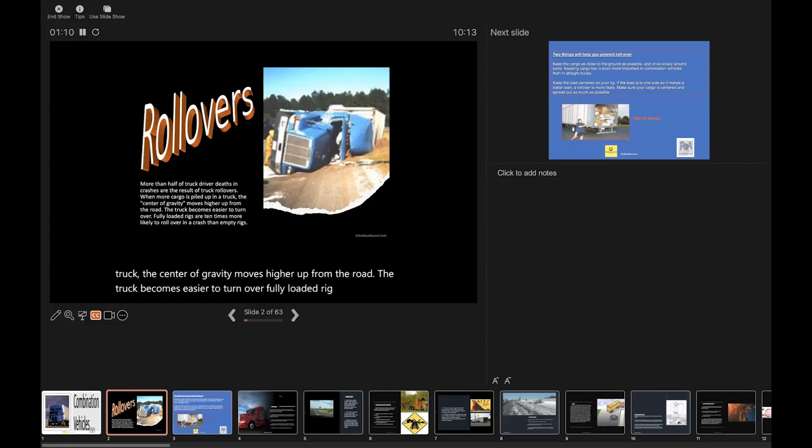Okay, so rollovers. More than half of truck driver deaths in crashes are the result of truck rollovers. When more cargo is piled up in a truck, the center of gravity moves higher up from the road, and the truck becomes easier to turn over. Fully loaded rigs are 10 times more likely to roll over in a crash than empty rigs.

Two things to help prevent a rollover: keep the cargo as close to the ground as possible, and drive slowly around turns. Keeping cargo low is even more important in combination vehicles than in straight trucks. Keep the load centered on your rig. If the load is to one side, making the trailer lean, a rollover is more likely. Make sure your cargo is centered and spread out as much as possible.

So if you look at this picture, this is what we call loose loaded - it's not palletized, it's just boxes all up in here. Does this look like the right or wrong way to load the trailer? Just put it in the chat. Yeah, it's absolutely wrong. If you open these doors, all of this can just fall on you once you get to your final destination.

So anything that's loose loaded should not be loaded all the way to the back. You should definitely have some space, and you should definitely have some load bars or netting, something to secure this so that when you open the doors, it doesn't just fall on you.

Those of you who are not leaving Texas for work, you might get on Dollar General accounts, or Dollar Tree, UPS, mail, Amazon. All of these are loose loaded trucks or trailers. So this is very common to see, but this is also very unsafe.

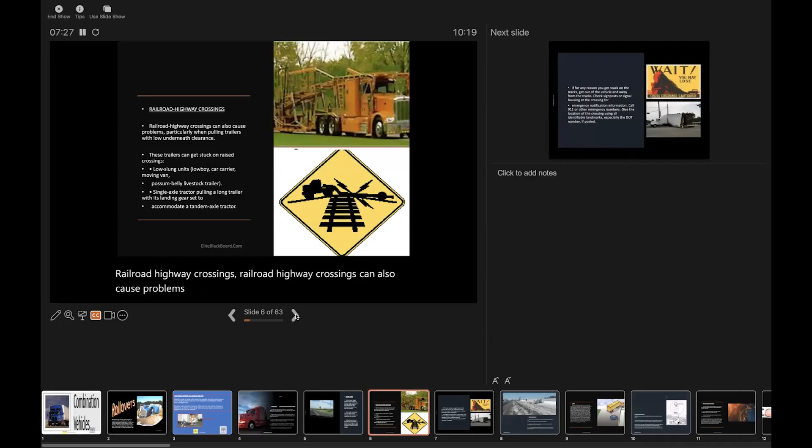Railroad highway crossings can also cause problems, particularly when pulling trailers with low underneath clearance. These trailers can get stuck on raised crossings: low slung units, low boy car carriers, moving vans, possum belly livestock trailers, single axle tractor pulling a long trailer with its landing gear. All of these are examples of trailers or truck and trailer combinations that can absolutely get you stuck on a train track, so you definitely want to be cautious. And I like this sign, which is why I put it, because it shows me this trailer is entirely too low and it absolutely can get caught in this pivot right here because of it being a combination vehicle.

If for any reason you get stuck on the tracks, you want to get out of the vehicle and away from the tracks. Check your signposts or signals housing at the crossing for any emergency notification information. You want to call 911, give the location of where you are, any identifiable landmarks if you're in a rural area especially, the DOT number if it's posted. Sometimes you'll see mile marker number 234 - you want to give them that information, let them know if you're southbound, northbound, east or west.

Preventing trailer skids: when the wheels of a trailer lock up, the trailer will tend to swing around. This is more likely to happen when the trailer is empty or lightly loaded. Recognize the skid - the earliest and best way to recognize that the trailer has started to skid is by seeing it in your mirrors. I mentioned this last week, if you can recall. You can tell when your trailer is starting to skid. Sometimes you can feel it, but you absolutely can see it. It's one of the things that I did all the time when I was on the roads and it was snowing. I was definitely alert.

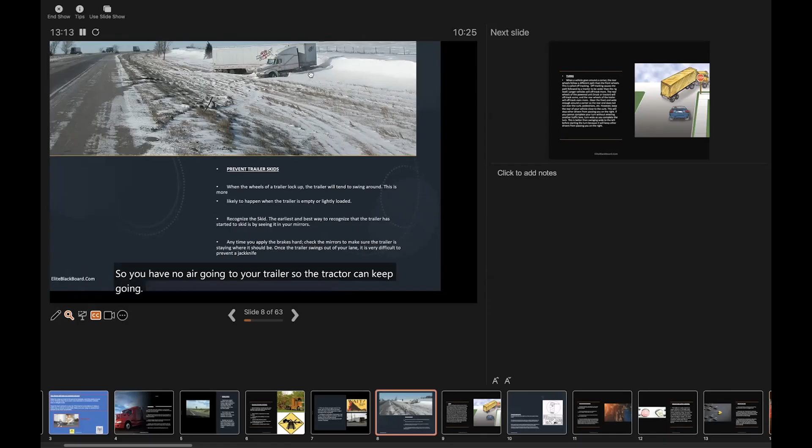Yes, you most likely will have to get a tow truck. What happens is all of the wires, your air lines, everything connected from your truck to your trailer has popped, so you have no air going to your trailer. The tractor can keep going as long as you didn't mess up anything underneath, but the trailer cannot, so it would have to be lifted off the ground by the tires and towed. Sometimes the tractor by itself is fine and can disconnect so you can get your trailer towed, but for the most part, depending on how you got jackknifed, you messed up your tractor too.

Okay, so turns. When a vehicle goes around a corner, the rear wheels follow a different path than the front wheels. This is called off-tracking. Off-tracking causes the path followed by a tractor to be wider than the rig itself. Longer vehicles will off-track more. The rear wheels of the powered unit, your truck or tractor, will off-track some, and the rear wheels of the trailer will off-track even more.

Steer the front end wide enough around a corner so the rear end does not run over the curb, pedestrians, etc. You can see he's going around the corner very close. You don't want to turn like this car is doing here - you're going to take all of this out, even in the black. You definitely want to come out and start turning. He can potentially hit all of this because he turned out, but he turned in too sharp.

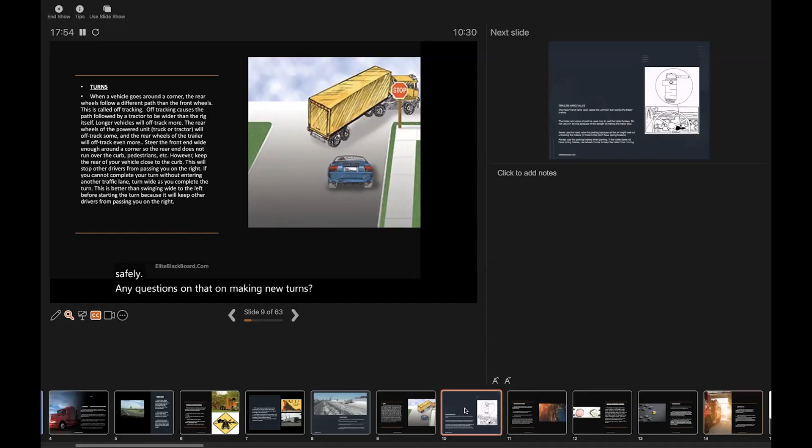So the trailer hand valve, also called the Johnson bar, haven't heard anybody call that outside of this book, works the trailer brakes. The trailer hand valve should be used only to test the trailer brakes. Do not use it in driving because of the danger of making the trailer skid, all right? So that's what you see right here on the steering wheel. A lot of your trucks do have this, all right? So I do want you to know what it's for. All right, so I'll go over this again. The trailer hand valve works the trailer brake, all right? But you do not use this while you're driving.

Never use the hand valve for parking because all the air might leak out, unlocking your brakes. Always use the parking brakes when parking. If the trailer does not have spring brakes, use wheel chocks to keep the trailer from moving.

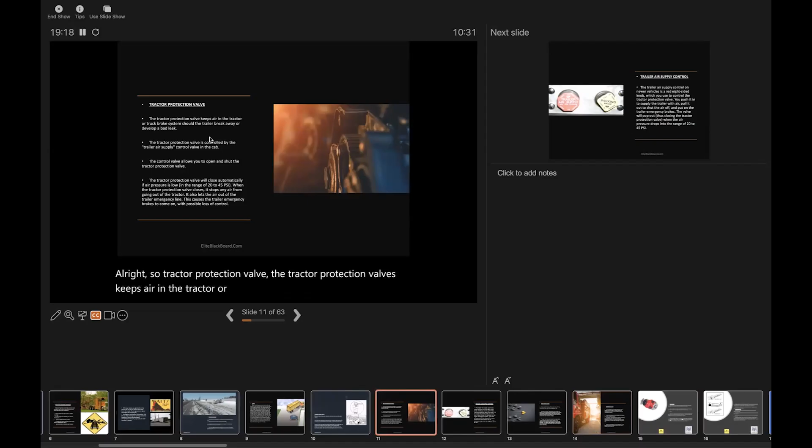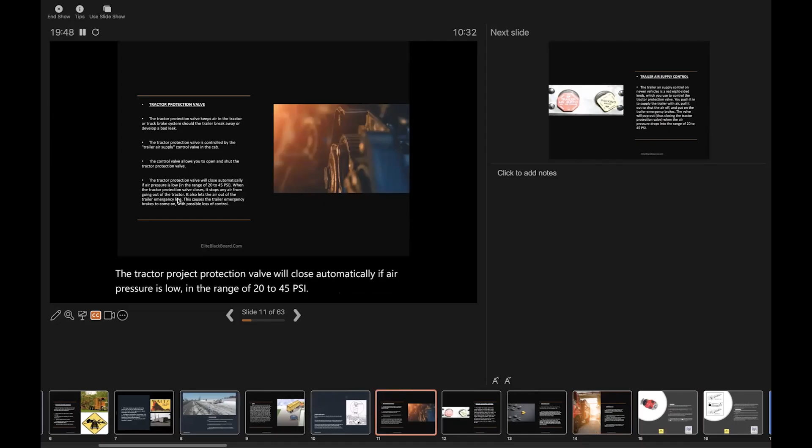All right, so tractor protection valve. The tractor protection valve keeps air in the tractor or truck brake system should the trailer break away or develop a bad leak. The tractor protection valve is controlled by the trailer air supply control valve in the cab. The control valve allows you to open and shut the tractor protection valve. The tractor protection valve will close automatically if air pressure is low, in the range of 20 to 45 psi. When the tractor protection valve closes, it stops any air from going out of the tractor. It also lets the air out of the trailer emergency line. This causes the trailer emergency brakes to come on with possible loss of control.

All right, who knows what these two are? Anybody? That's the park brakes. Your trailer and parking brakes. Correct, correct. So the trailer air supply control on newer vehicles is a red, 8-sided knob, which you use to control the tractor protection valve. You push it in to supply the trailer with air. You pull it out to shut off the air. You put on your trailer emergency brakes, all right? The valve will pop out, thus closing your tractor protection valve when the air pressure drops into the range of 20 to 45 psi.

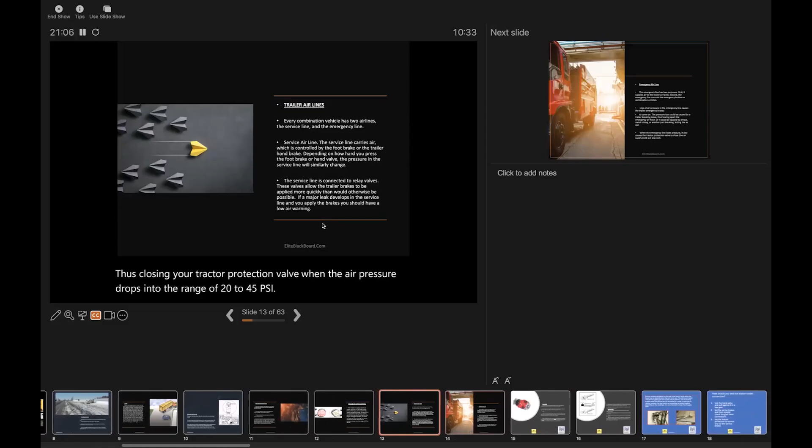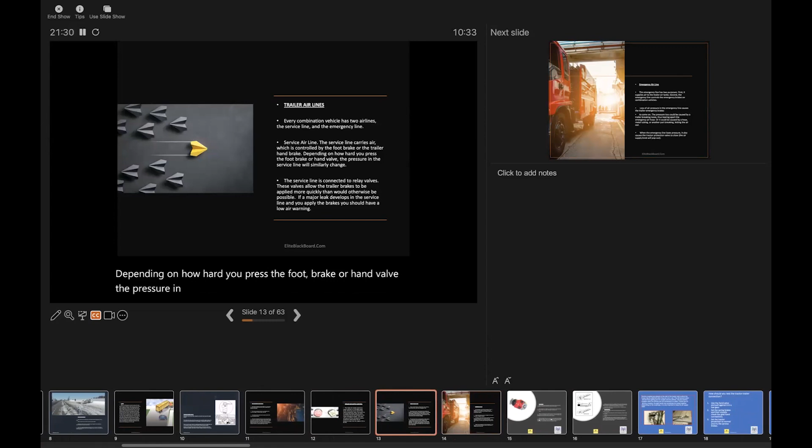On trailer airlines, every combination vehicle has two airlines, your service line and your emergency line. Your service airline carries air which is controlled by your foot brake or the trailer hand valve. Depending on how hard you press the foot brake or hand valve, the pressure in the service line will change. The service line is connected to relay valves. These valves allow the trailer brakes to be applied more quickly than would otherwise be possible.

If a major leak develops in the service line and you apply the brakes, you should have a low air warning. Okay? Any questions on that? No, ma'am. Okay.

Emergency air line. The emergency line has two purposes. First, it supplies air to our trailer air tank. Secondly, the emergency line controls our emergency brakes on combination vehicles. Any loss of air pressure in the emergency line can cause the trailer emergency brakes to engage. The pressure loss could be caused by a trailer breaking loose, thus tearing apart the emergency air hoses, or it could be caused by a hose, metal tubing, or another part breaking, letting the air out. When the emergency line loses air pressure, it also causes the tractor protection valve to close. Thus, our air supply knob will pop out, okay?

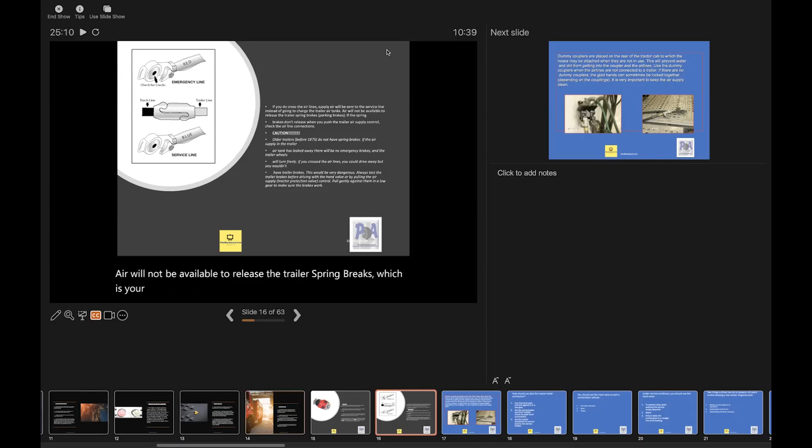Okay, so if you do cross the airlines, supply air will be sent to the service line instead of going to charge the trailer air tanks. Air will not be available to release the trailer spring brakes, which is your parking brakes. If the spring brakes don't release when you push the trailer air supply control, you want to check your airline connections.

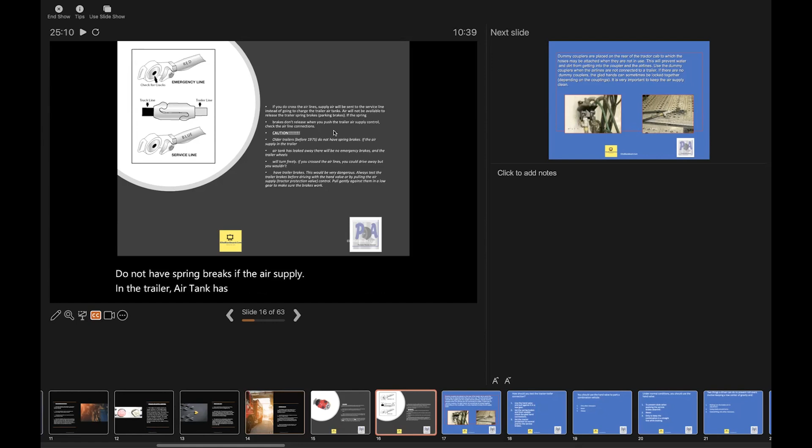All right, so older trailers do not have spring brakes. If the air supply in the trailer air tank has leaked away, there will be no emergency brakes and the trailer wheels will turn freely. If you cross the air lines, you could drive away, but you wouldn't have trailer brakes. This would be very, very dangerous.

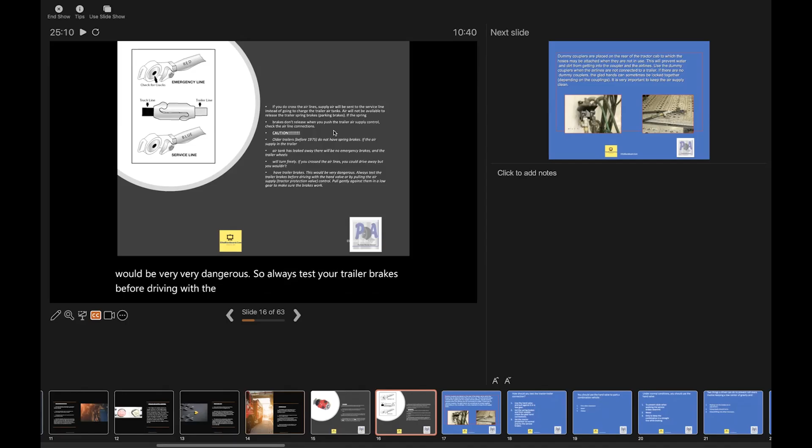So always test your trailer brakes before driving with the hand valve or by pulling your air supply control. Pull gently against them in a low gear to make sure the brakes work. All right, so regardless of what type of brakes you have, you should always be testing your brakes before you take off. It's part of your pre-trip inspection.

You should always, always, always test your brakes, even if it was good the night before when you parked it. You test it in the morning before you take off. Brakes fail all the time. That's something you will learn about these trucks, period. Going forward, you know, they break down all the time.

It's never planned, but do your own due diligence to try to catch it before it happens while you're in transit. That's the worst thing that could happen, is that it happens while you're driving.

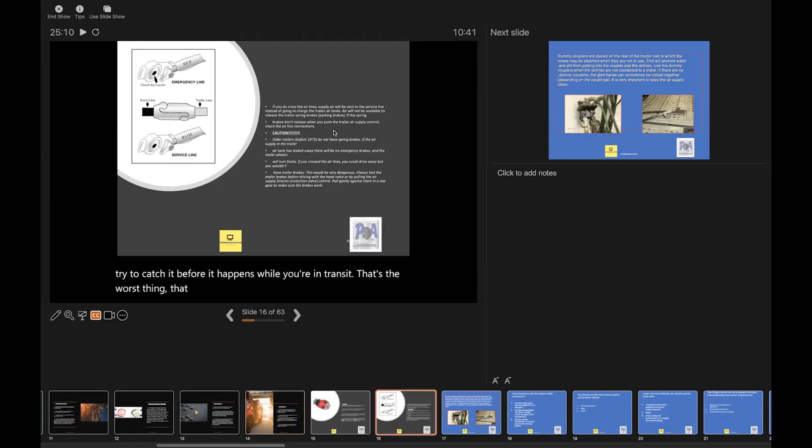All right, so dummy couplers are placed on the rear of the tractor cab to which the hoses may be attached when they are not in use. This will prevent water and dirt from getting into the coupler and the airlines. Use the dummy couplers when the airlines are not connected to a trailer. If there are no dummy couplers, the glad hands can sometimes be locked together depending on the couplings. It is very important to keep your air supply clean.

So on the back of your tractors, they have the dummy couplers where you would just slide it in there and lock it, in case you're bobtailing by yourself, or you have a dump truck, etc., and you don't have a trailer connected to it. You just go ahead and put it in there.

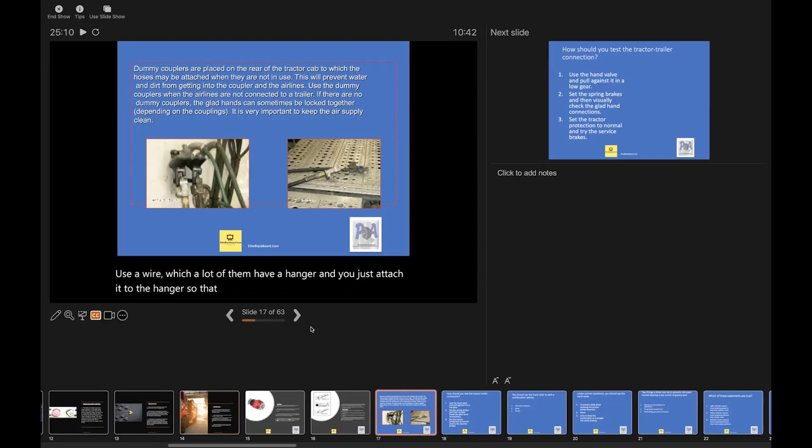In the event you don't have it, you can connect them together, and then you can use a wire, which a lot of them have a hanger, and you just attach it to the hanger so that they don't hang on the ground, causing sparks and things like that.

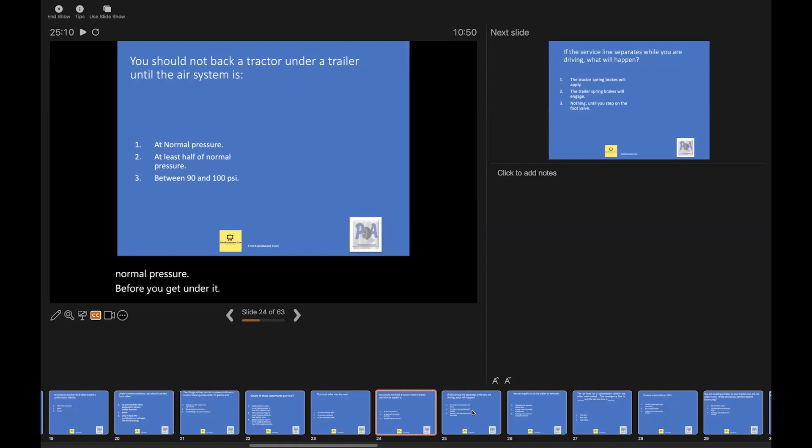If the service line separates while you are driving, what will happen? Anybody else remember? Mr. Clark is correct. Nothing will happen until you step on the foot valve.

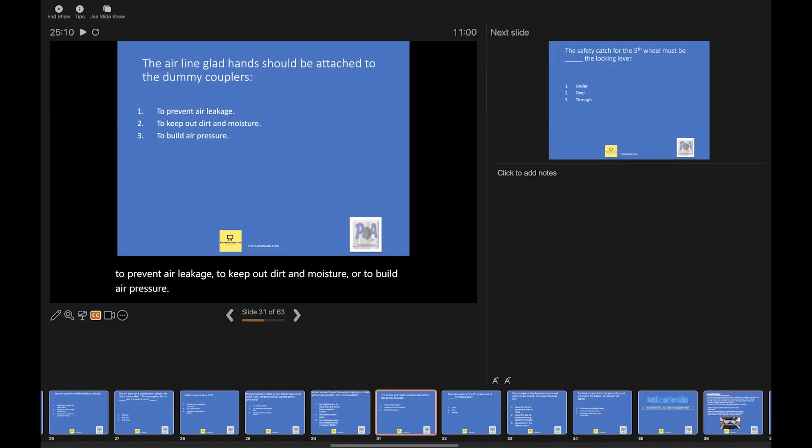Anyone else want to take a stab at it? Okay, yes. So when we use our dummy couplers, that's because we are not attached to anything. So instead of our airlines just hanging on the ground, or just loosely flying behind us on the truck while we're driving, we're gonna place them in the dummy couplers if we have them. So it definitely helps to prevent them being broken or damaged, but it also helps to stop moisture and dirt from getting inside of them. So it would be number 2.

The safety catch for the fifth wheel must be blank the locking lever.

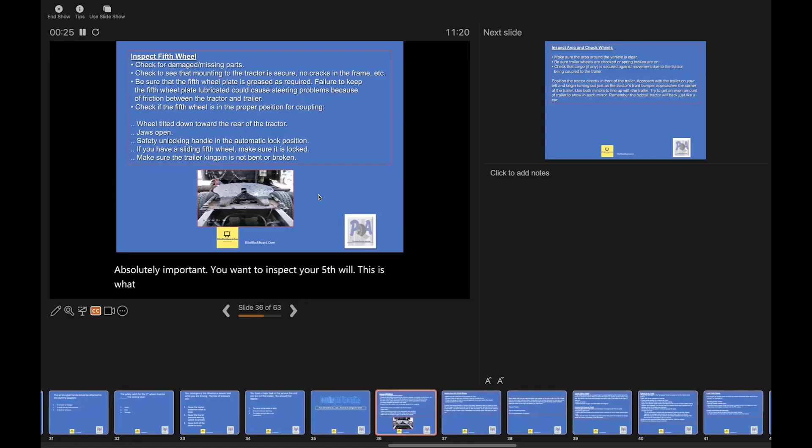Absolutely important. You want to inspect your fifth wheel. This is what the fifth wheel looks like right here. Let me zoom in just a little bit.

So how do we inspect our fifth wheel? We want to check for damaged or missing parts, check that the mounting to the tractor is secure, and that there are no cracks in the frame, etc. Be sure the fifth wheel plate is greased as required. Failure to keep the fifth wheel plate lubricated could cause steering problems because of friction between our tractor and our trailer.

We want to check if the fifth wheel is in proper position for coupling: the wheel is tilted toward the rear of the tractor, the jaws are open, and the safety unlocking handle is in the automatic lock position. If you have a sliding fifth wheel, make sure it is locked. Make sure the trailer kingpin is not bent or broken.

So this is the fifth wheel right here, and this is our skid plate. We want to make sure that it is properly lubricated when we are inspecting it as well.

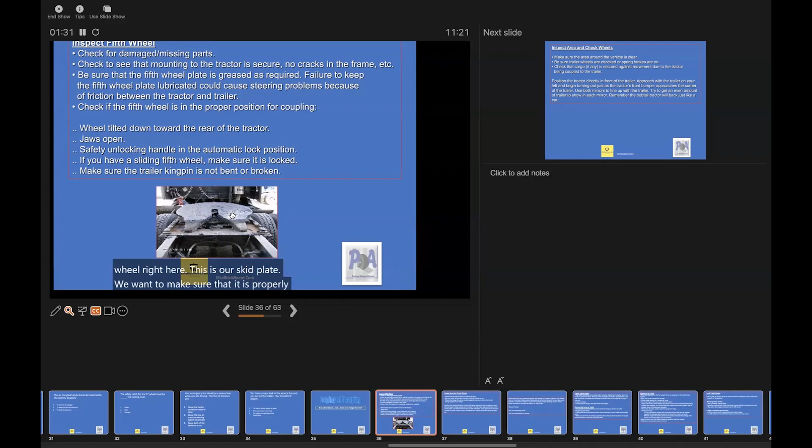Inspect the area and chock the wheels. Make sure the area around the vehicle is clear. Be sure your trailer wheels are chocked or spring brakes are on. You want to check that the cargo, if any, is secured against movement due to the tractor now being coupled to the trailer.

Position the tractor directly in front of the trailer. Approach with the trailer on your left and begin turning out just as the tractor's front bumper approaches the corner of the trailer. Use both mirrors to line up with the trailer, trying to get an even amount of trailer to show in each mirror. Remember, the bobtail tractor will back just like a car.

Give me one second, I'm going to pull up the video so that you can see this visually.

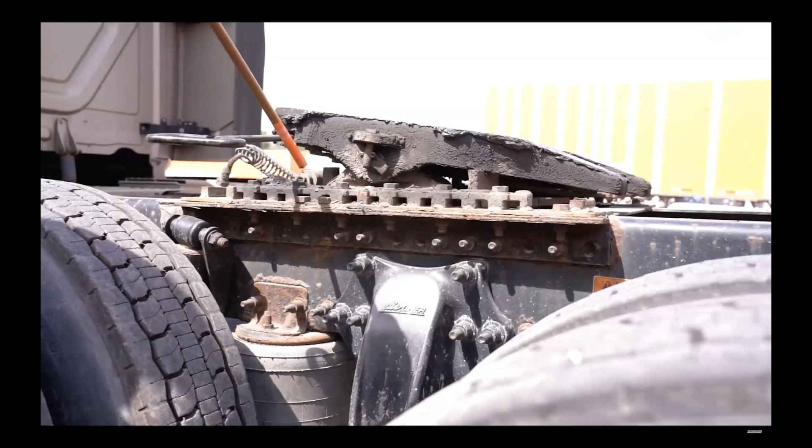Starting on the driver's side of the truck, make sure the fifth wheel is securely mounted with no cracks or illegal welds. The pivot pin and cotter key are secure, the slider pins are locked into place, and the slider stop locks are also secure.

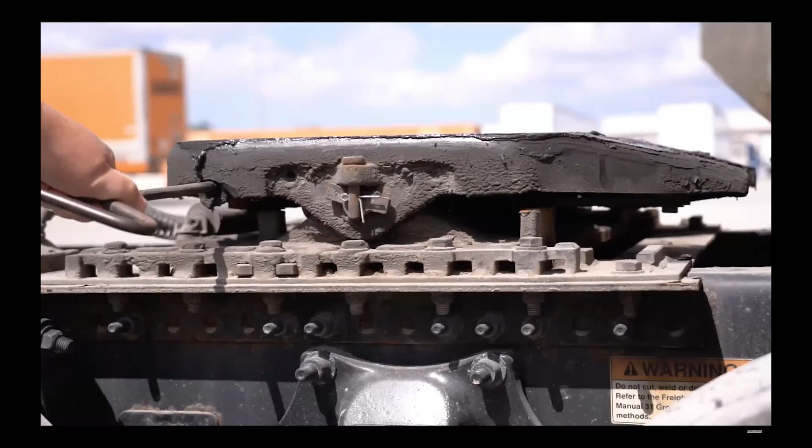Pull the handle all the way out and ensure that it's not bent, that the rear of the fifth wheel is fully tilted down, and the plate is well greased. Check the landing gear for cracks, bends, and broken parts.

Walk around the entire trailer and ensure that the tandem release handle is pushed all the way in and down, the slider locks are engaged, and the brake shoes are tight against the drums. Also check that there are no obstacles above, below, or around the trailer that would prevent it from coupling.

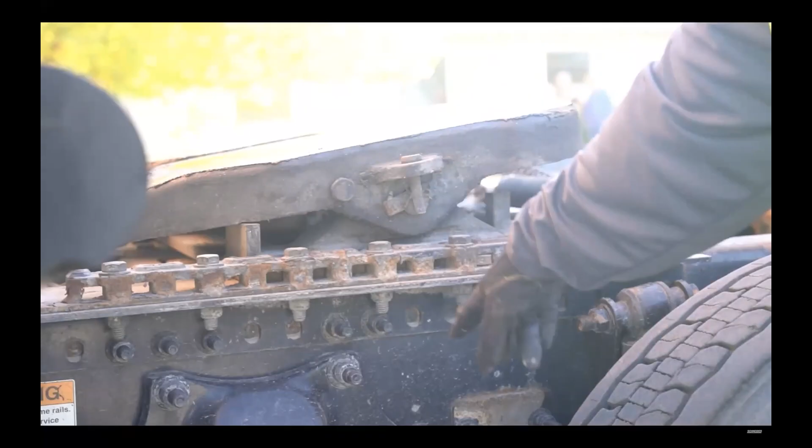Inspect the fifth wheel from the passenger side and ensure it's securely mounted with no cracks or illegal welds. Check the pivot pin and cotter key, and look at the slider pins and slider stop blocks. Make sure everything is locked in place and damage-free.

Slowly back up until the fifth wheel picks up the nose of the trailer. Stop before the fifth wheel locks. Once the trailer suspension adjusts, back up gently until the fifth wheel locks.

Listen for a click or wait until you feel the tractor will not back any further. After it locks, gently pull the tractor forward until you feel it tug on the kingpin without moving the trailer. Do this twice to ensure the kingpin is locked into the fifth wheel.

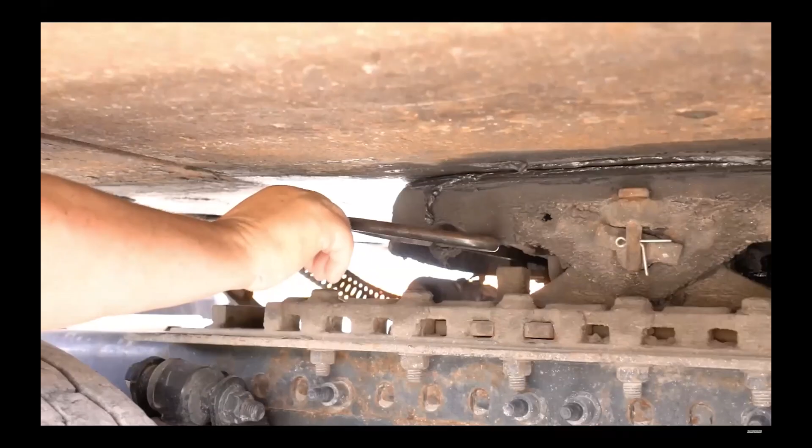Put the truck in neutral, set the brake, turn off the engine, take the key and exit the truck to make sure there's no gap between the trailer and the fifth wheel. Push the release handle, ensure it is properly positioned. Check to make sure the locking bar of the fifth wheel jaw is fully across the kingpin. The lower flange of the kingpin is visible under the locking bar.

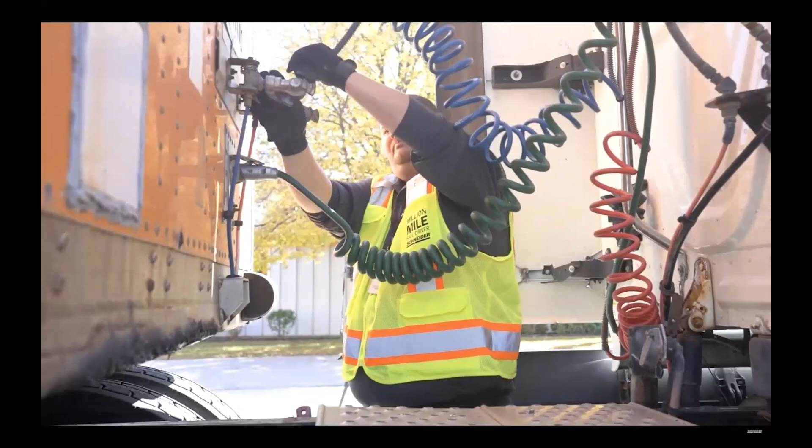Connect the air and electrical lines. There are 3 lines on the tractor: red, green, and blue. Grab the blue line by the glad hand and pull it down to release it from the coupler on the tractor. Place the blue line glad hand at a 90-degree angle with the trailer's blue coupler. Slide the glad hand's groove into the coupler to lock the line into place.

Next, grab the green line by the black plug and pull up to release it from the tractor socket. Find the round silver flat covered socket next to the blue line connection on the trailer. Lift the flap and push the green line's plug into the socket. Connect the red line's glad hand to the trailer's red coupler using the same steps as the blue line. Crank up the landing gear and secure the handle.

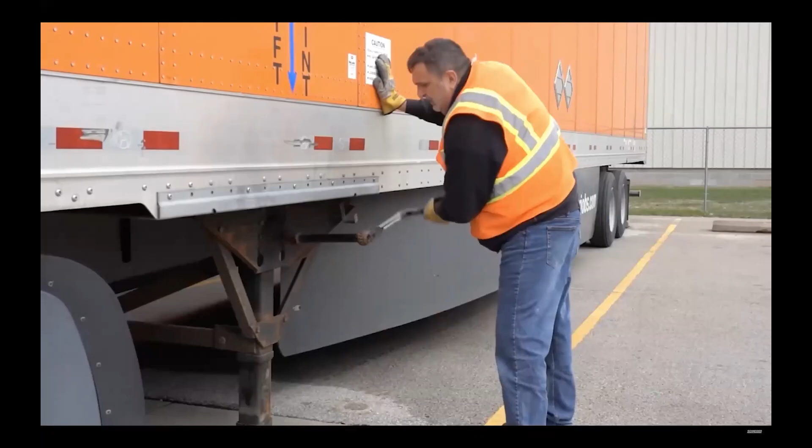The acronym for uncoupling a trailer is DROP. Deliver, roll down first, then release. Observe the uncoupling, pause.

Drive or back into position for uncoupling. Set the trailer brakes and back slightly to relieve the pressure between the fifth wheel locking jaw and the kingpin. Set the tractor brakes, shut down the tractor, remove the key from the ignition and exit the tractor. Check the ground for uneven surfaces or soft areas. Make sure you have a solid surface for the landing gear to rest.

Lower the landing gear until both pads are securely on the ground. There's no need for extra turns after that. Disconnect the air and electrical hoses, secure them to the back of the cab. Pull the release handle on the fifth wheel. If the handle does not pull easily, back the tractor up a very small amount to release pressure on the jaws.

Drive the truck slightly forward. Stop it with the trailer still over the top of the tractor's rear drive wheels. Make sure the trailer's landing gear is holding the weight of the trailer. Wait at least 60 seconds before pulling away to prevent damage to the tractor. Make sure the airbags are deflated and you have good traction before driving off.

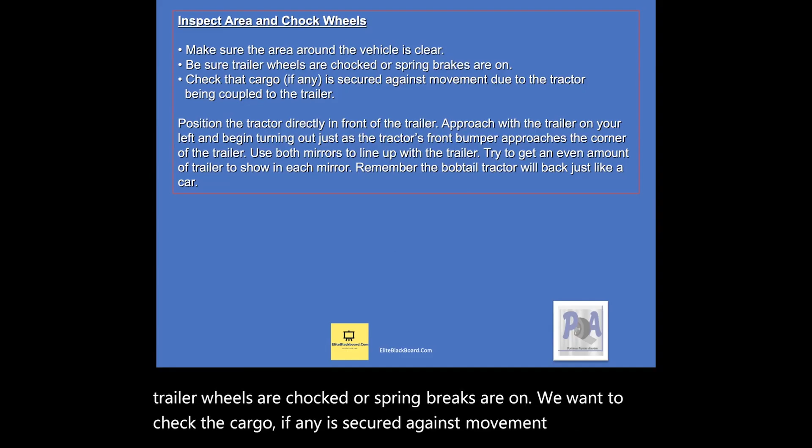So we want to inspect the area and chock our wheels. We want to make sure the area around the vehicle is clear. We want to be sure our trailer wheels are chocked or spring brakes are on. We want to check the cargo, if any, is secured against movement due to the tractor being coupled to the trailer.

Let's see. I think, let's go here. Let's go to the next slide.

All right, so we want to back slowly until we are approximately 1/4 of the way under the fifth wheel and no more than halfway under. Being able to tell where the point is may take some practice. It is better to stop too soon than too late.

Backing under a trailer when the trailer is too high can lead to what we call a high hook.

So what that means is the trailer is entirely too high. So when you go under, it's not clicking, it's not latching. So you can get stuck as well.

You definitely want to pay attention, which is why in the video it showed that he got under it just a little bit, but not enough for it to latch. That way it gives you time to look out of your window, look in your mirrors, or get out and inspect and make sure you're directly right under where you should be. If it's too high, you've got time to use your landing gears and bring yourself back down, lower your trailer, or raise it up if you need to.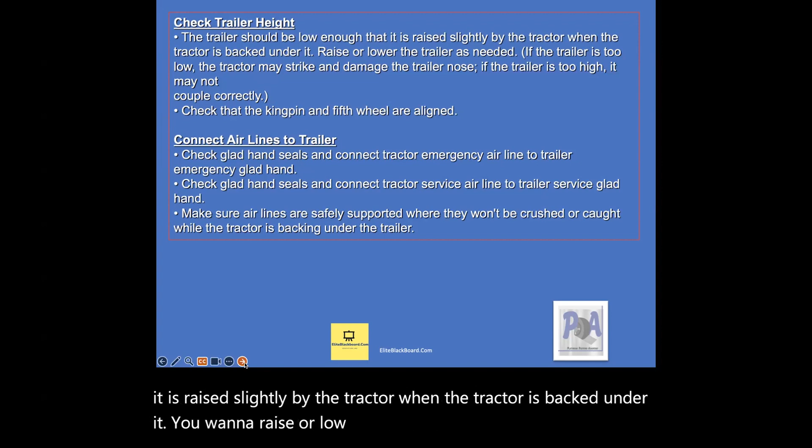Checking your trailer height: the trailer should be low enough that it is raised slightly by the tractor when the tractor is backed under it. You want to raise or lower the trailer as needed. If the trailer is too low, the tractor may strike and damage the trailer nose. If the trailer is too high, it may not couple correctly. You also want to check that the kingpin and fifth wheel are aligned.

Connect your air lines to your trailer. Check your glad hand seals and connect the tractor emergency air line to the trailer emergency glad hand. Check your glad hand seals and connect your tractor service air line to the trailer service glad hand. Make sure air lines are safely supported where they won't be crushed or caught while the tractor is backing under, okay?

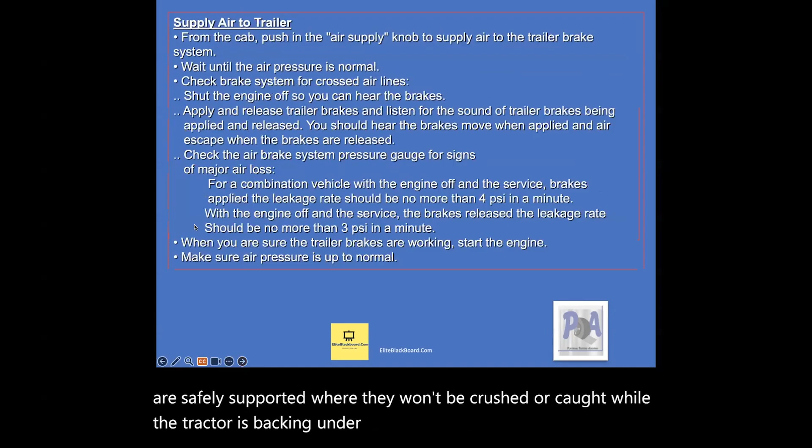Then we want to supply air to the trailer. From the cab, you want to push in the air supply knob to supply air to the trailer brake system. Who can tell me what color our air supply knob is?

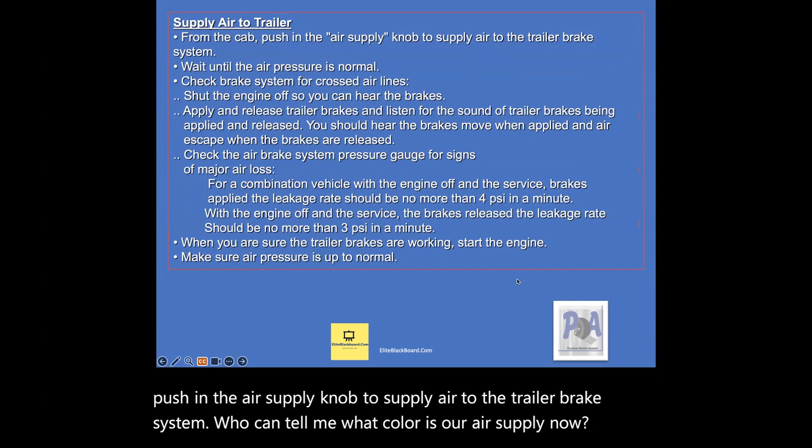Real quickly, who can tell me?

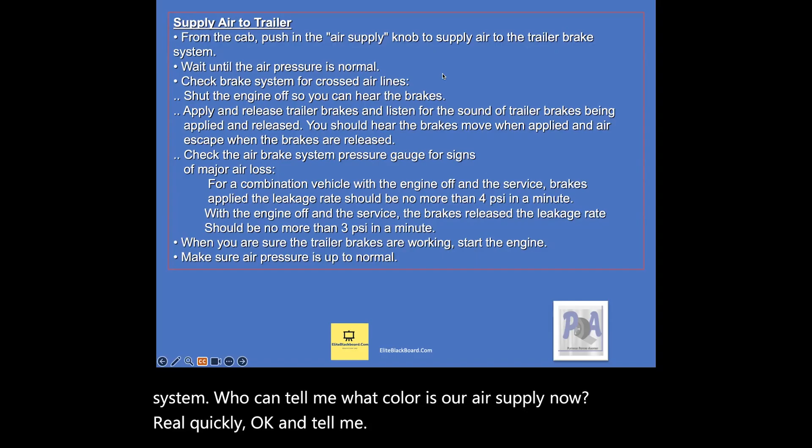The air supply knob inside the truck.

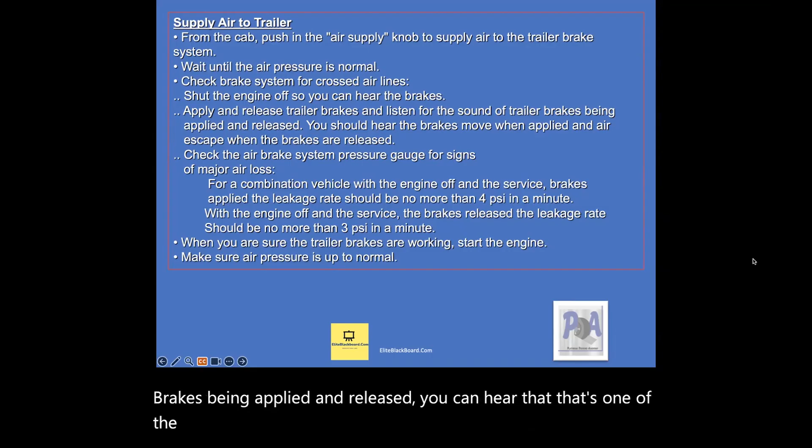Alrighty, so let's wait until the air pressure is normal. Check our brake system for any crossed lines. Shut the engine off so you can hear the brakes. Apply and release your trailer brakes and listen for the sound of the trailer brakes being applied and released. You can hear that. That's one of the things I like about the air brake system, it makes it very easy for us.

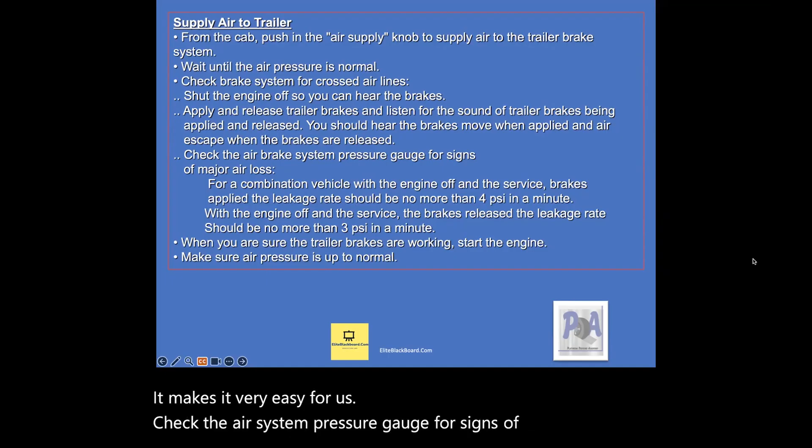Check the air brake system pressure gauge for signs of major air loss. For a combination vehicle with the engine off and the service brakes applied, the leakage rate should be no more than 4 psi in a minute.

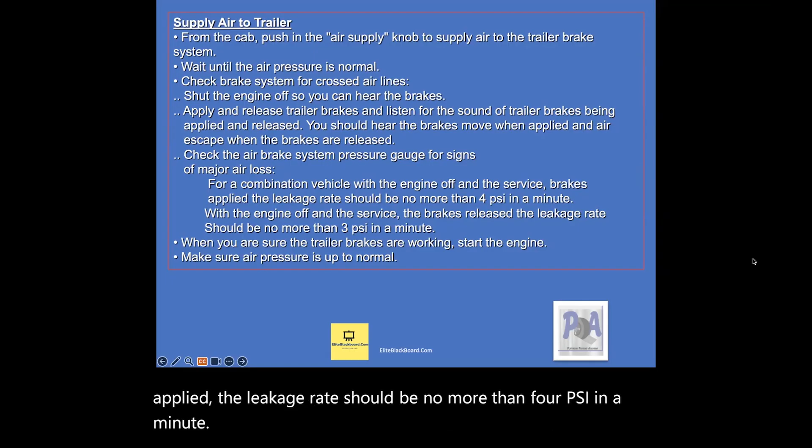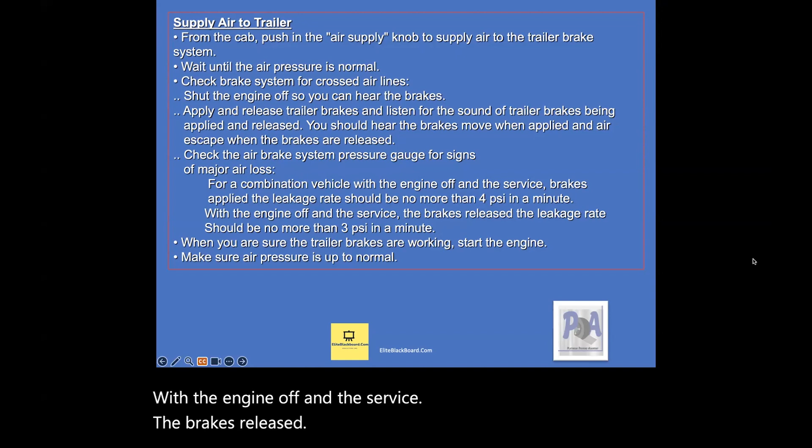With the engine off and the service brakes released, the leakage rate should be no more than 3 psi in a minute.

When you are sure the trailer brakes are working, start your engine. Make sure your air pressure is up to normal.

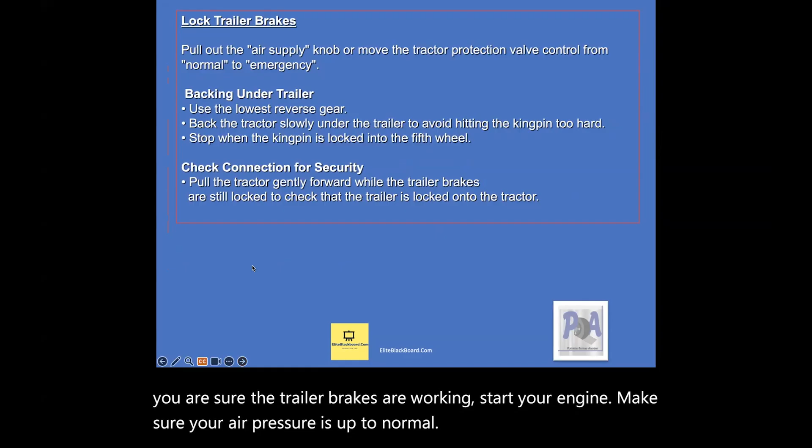Locking our trailer brakes, we want to pull out the air supply knob or move the tractor protection valve control from normal to emergency. Backing under the trailer.

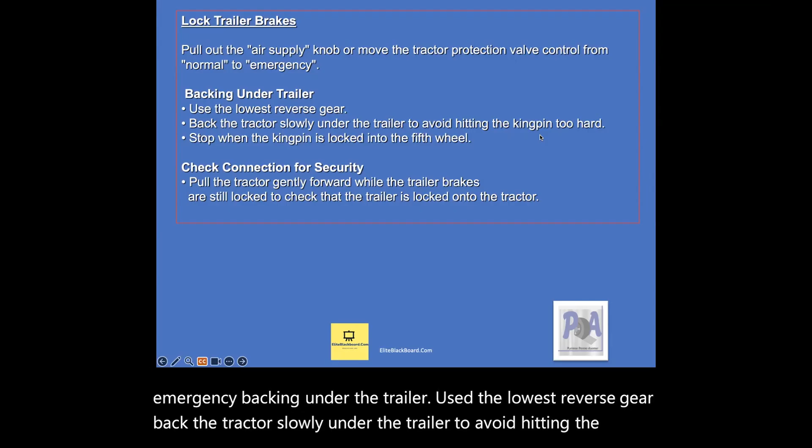Use the lowest reverse gear. Back the tractor slowly under the trailer to avoid hitting the kingpin too hard. Stop when the kingpin is locked into the fifth wheel.

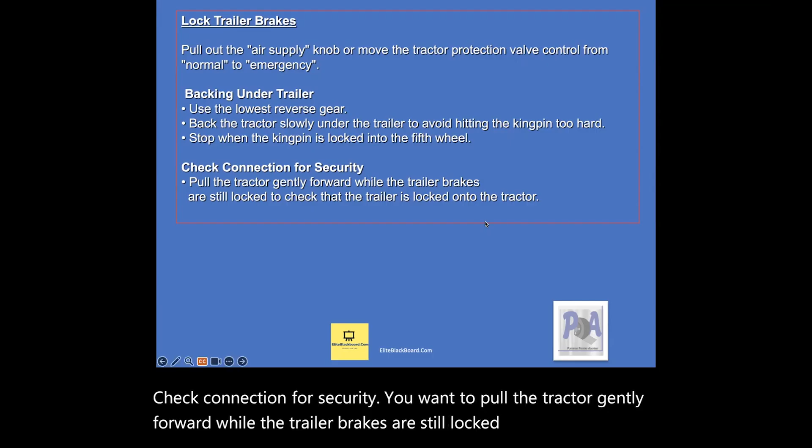Check connection for security. You want to pull the tractor gently forward while the trailer brakes are still locked to check that the trailer is locked onto the tractor.

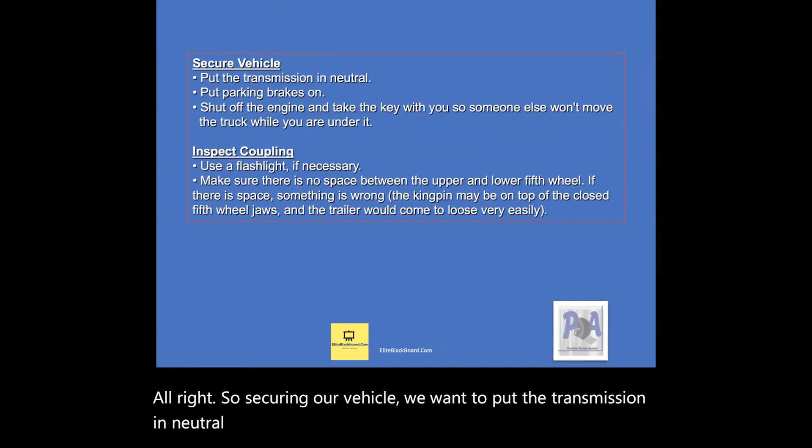All right, so securing our vehicle. We want to put the transmission in neutral. We want to put our parking brakes on. We want to shut off the engine and take the key with us so someone else won't move it while we are under the truck. All right, so this is very important.

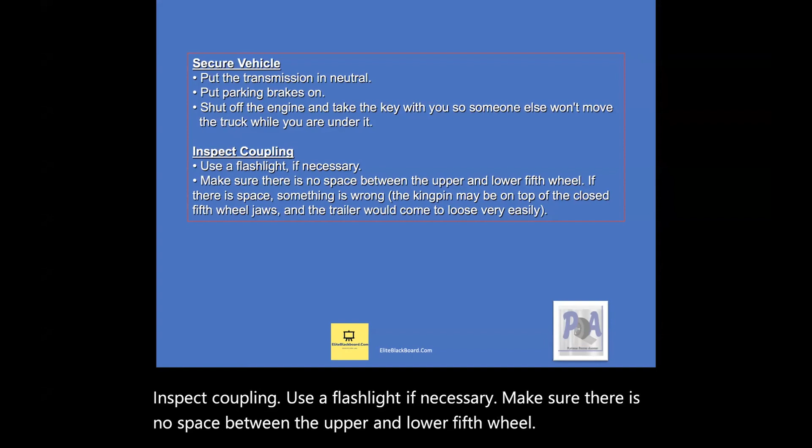It's very important to make sure that we are securing our vehicles, especially when we're in the yards. Inspect coupling, use a flashlight if necessary. Make sure there is no space between the upper and lower fifth wheel. If there is space, something is wrong. The kingpin may be on top of the closed fifth wheel jaws, and the trailer would come loose very easily.

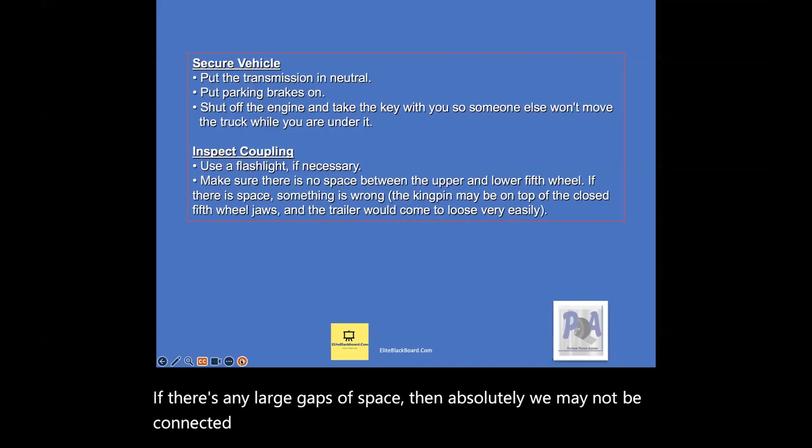So we want to make sure that there's proper spacing between it, all right? If there's any large gaps of space, then absolutely we may not be connected correctly. So you want to inspect it and make sure before you pull. What's the most prominent way to inspect that we are connected correctly?

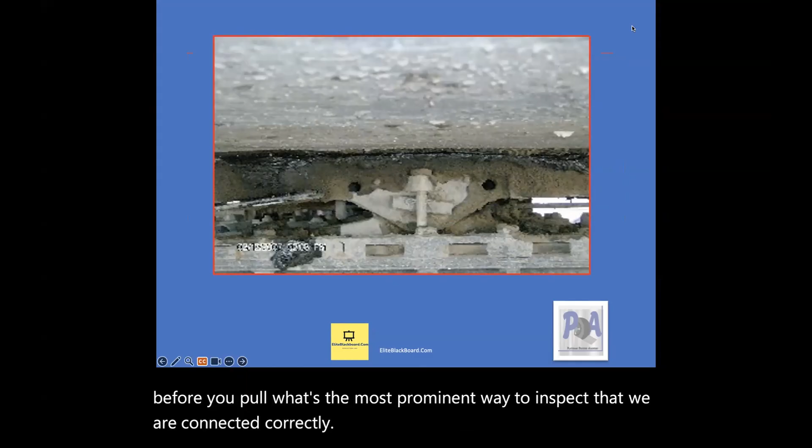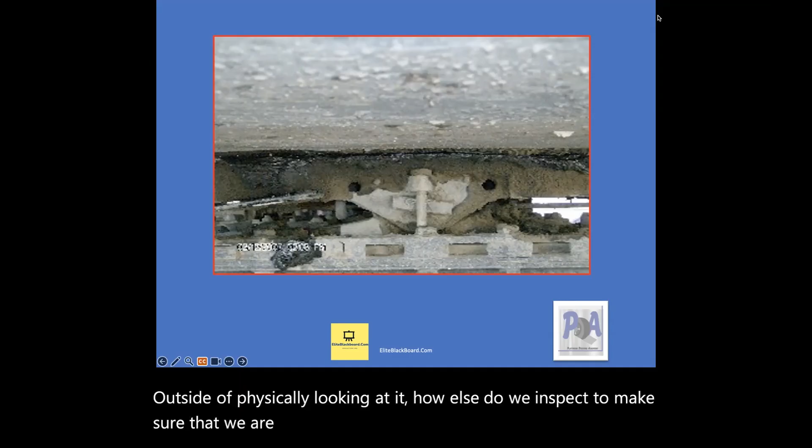Who can answer that for me? Outside of physically looking at it, how else do we inspect to make sure that our truck is connected correctly to our trailer?

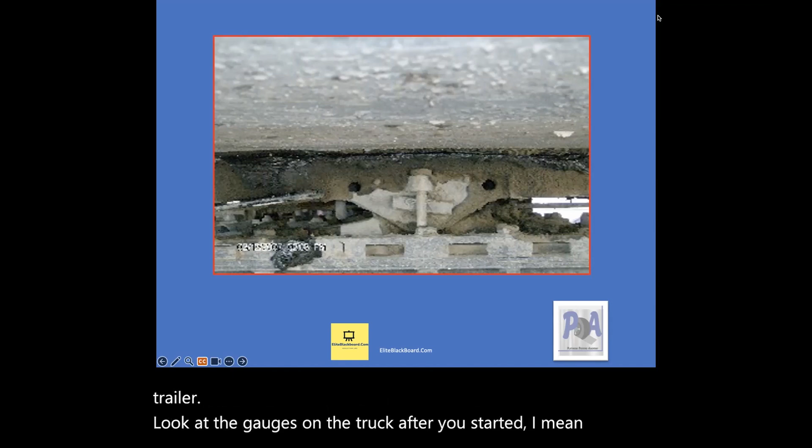To go look at the gauges on the truck after you start, to see how the air pressure is, right? That's one thing, but even without the airlines on it, how can we check?

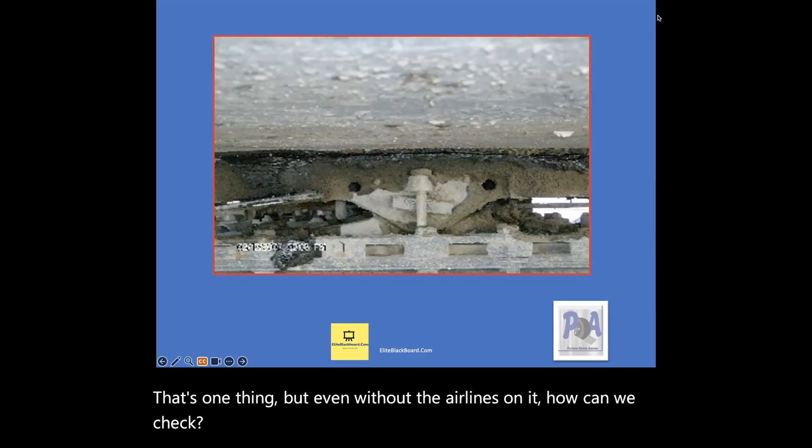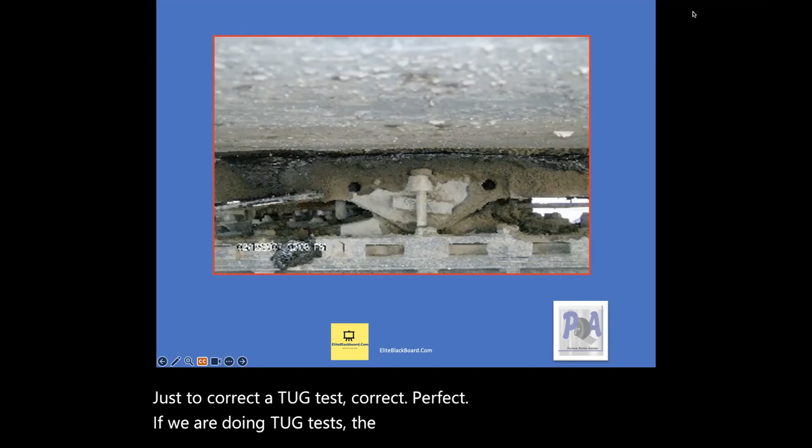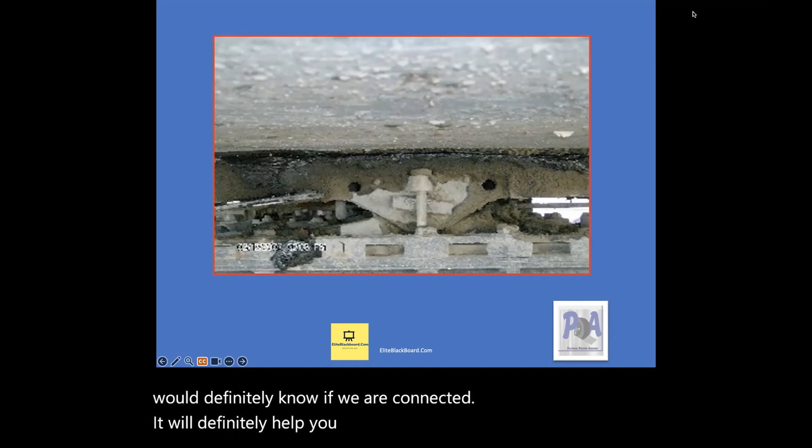A tug test? Correct, a tug test. Okay, yes, ma'am, perfect. If we are doing tug tests the right way, so not connecting and then backing off, but actually doing a tug test, then we would definitely know if we are connected. It will definitely help you from not dropping your trailer.

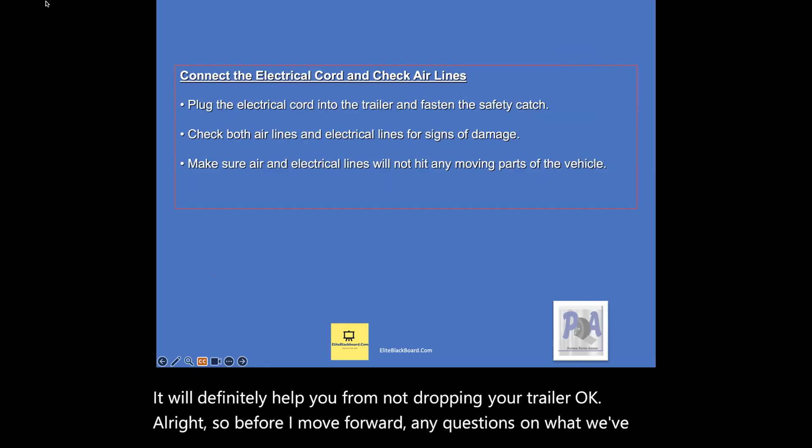All right, so before I move forward, any questions on what we went over so far? No, ma'am. Okay, good.

Okay, I apologize that, guys. I was not realizing I was on mute.

All right, so connect the electrical cord and check air lines. We want to plug the electrical cord into the trailer and fasten the safety catch. We want to check both air lines and electrical lines for signs of damage. We want to make sure that the air and electrical lines will not hit any moving parts of the vehicle.

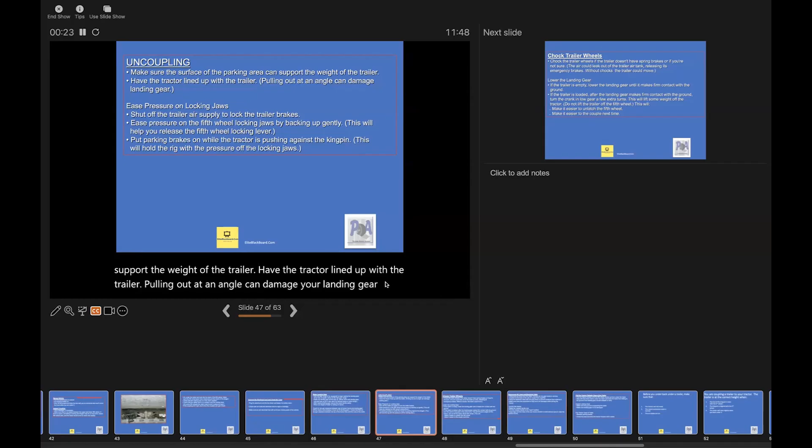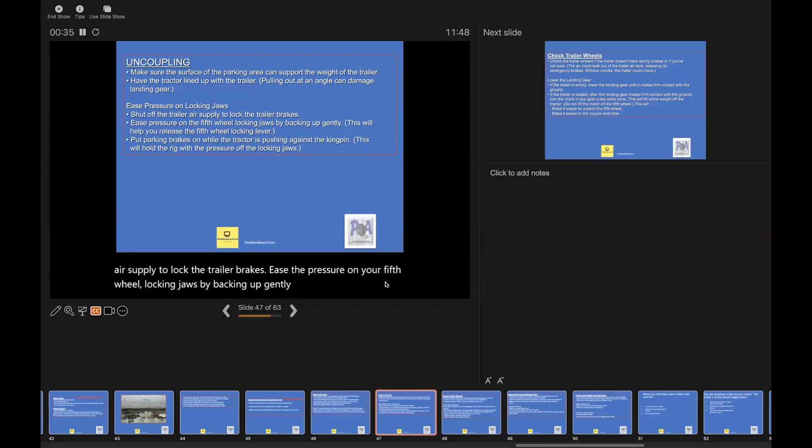So for uncoupling, make sure the surface of the parking area can support the weight of the trailer. Have the tractor lined up with the trailer, pulling out at an angle can damage your landing gears. Ease the pressure on locking jaws. You want to shut off the trailer air supply to lock the trailer brakes. Ease the pressure on your fifth wheel locking jaws by backing up gently. This will help you release the fifth wheel locking lever. Put parking brakes on while the tractor is pushing up against the kingpin. This will hold the rig with the pressure off of the locking jaws.

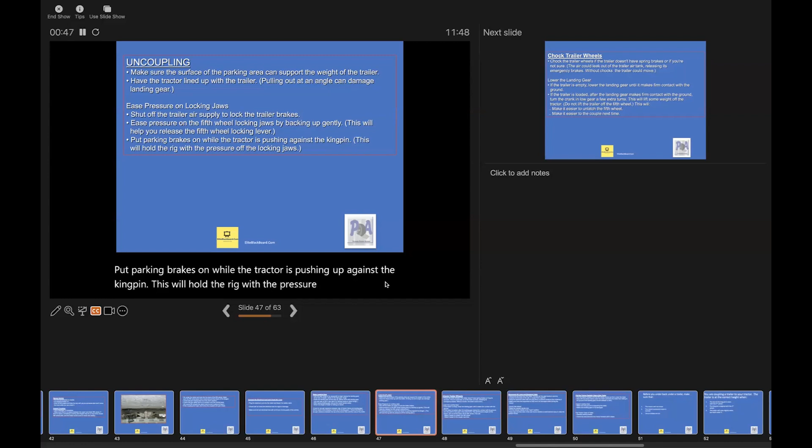Okay, so chocking our trailer wheels. Does everyone know what chocks are? You want to chock your trailer wheels if the trailer doesn't have spring brakes or if you're not sure. The air could leak out of the trailer air tank, releasing its emergency brakes. Without chocks, the trailer could move.

You want to lower the landing gear. If the trailer is empty, lower the landing gear until it makes firm contact with the ground. If the trailer is loaded, after the landing gear makes firm contact with the ground, turn the crank in low gear a few extra turns. This will lift some weight off of the tractor. Do not lift the trailer off of the fifth wheel. This will make it easier to unlatch the fifth wheel, and it will also make it easier to couple the next time you need to.

All right, after that, we want to disconnect our air lines and our electrical cables. How do we do that? We disconnect the air lines from the trailer. We connect our air line glad hands to the dummy couplers at the back of the cab, or couple them together. We hang the electrical cable with the plug down to prevent moisture from entering it. We make sure lines are supported so that they won't be damaged while driving the tractor.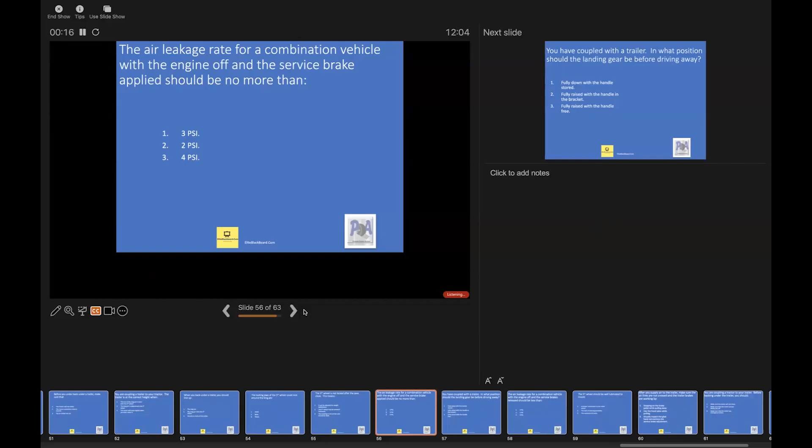You have coupled with a trailer. In what position should the landing gear be before driving away? 1, fully down with the handle stored. 2, fully raised with the handle in the bracket. 3, fully raised with the handle free.

Everybody's got that answer correct. It should be fully raised with the handle in the bracket. When we're driving along on the highway, we don't need the handle flopping around out there. It can loosen up the screw, possibly fall off of the trailer and hit someone else's car.

So the correct answer for that one is 2.

Next question: the air leakage rate for a combination vehicle with the engine off and the service brakes released should be less than 1, 3 psi; 2, 2 psi; or 3, 4 psi. For students already in this class, we know during the in-cab inspection, once we release the brakes, we do that 1-minute leak test. As we're pressing on the brake for the leak test, we shouldn't lose no more than 4 psi. So the correct answer is 4 psi, which is 3.

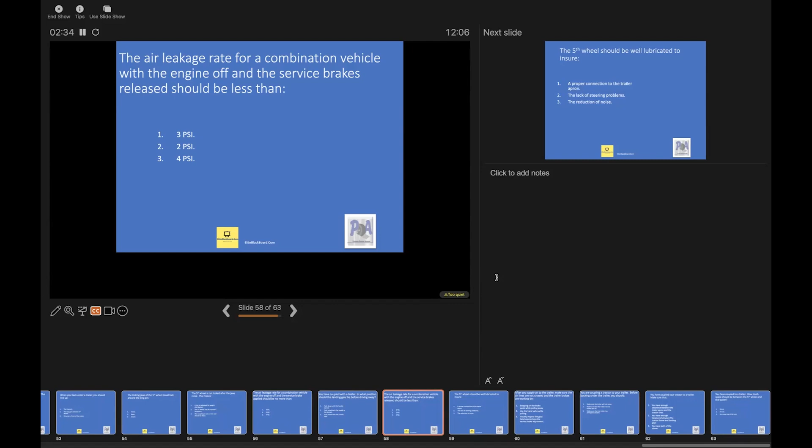Next question: the fifth wheel should be well lubricated to ensure 1, a proper connection to the trailer apron; 2, the lack of steering problems; or 3, the reduction of noise. Everybody's chimed in on 2, which is correct, the lack of steering problems. If the skid plate connected to the trailer isn't greased, it can cause a stutter or lack of smoothness when steering - it's nothing but friction, and you'll strip your skid plate, creating metal shavings. It has to be properly lubed in order to steer correctly, giving you nice smooth steering when turning either left or right. So the correct answer is number 2.

After you supply air to the trailer, make sure the air lines are not crossed and the trailer brakes are working by 1, stepping on the brake pedal while pulling away; 2, using the hand valve while pulling; or 3, visually inspecting the glad hand, connectors and connections, and the service brake adjustment. The correct answer is number 1.

You are coupling a tractor to your trailer. Before backing under the trailer, you should 1, make sure the trailer will not move; 2, make sure the trailer service brakes are off; or 3, make sure the trailer has emergency brakes. The correct answer is number 1.